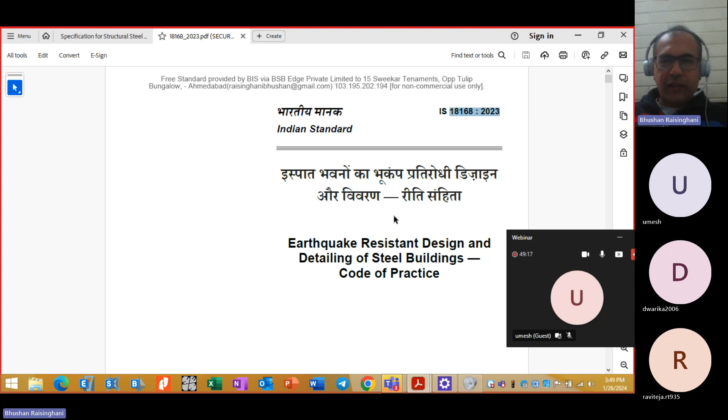I hope my screen is visible to all. Yes, it is visible, sir. So it is from year 2023, just last year it was released, and the title is Earthquake Resistant Design and Detailing.

So it is both design and detailing of steel buildings, code of practice. Buildings designed as per this standard are expected to sustain damage during strong earthquake ground shaking, and the provisions of this standard are intended for earthquake resistant design of only regular type buildings in which there are no dampers or dissipation devices. To control loss of life and property, base isolation or other advanced techniques may be adopted if required, for which Part 6, base isolated buildings, should be referred - that is 1893 Part 6 2022.

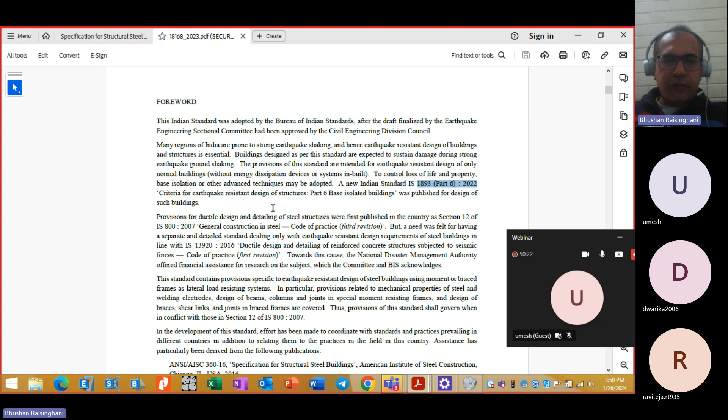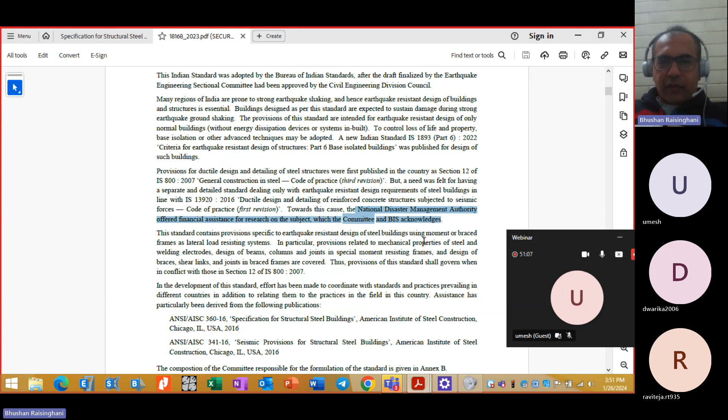Most importantly, the provisions for ductile design and detailing of steel structures were first published in the country as section 12 of IS 800-2007, but a need was felt for having a separate and detailed standard dealing only with earthquake resistant design requirements of steel buildings, in line with 13920 that is for concrete. Towards this cause, NDMA offered financial assistance for research on the subject, which the committee and BIS code has now acknowledged. So the entire reason for development of this code has been mentioned here.

The standard contains provisions specific to earthquake resistant design of steel buildings using moment resistant frame or braced frame as your lateral load resisting system. So moment and braced lateral load resisting systems are covered in this code. In particular, provisions related to mechanical properties of steel and welding electrodes, design of beams, columns, joints in SMRF, and design of brace, shear link, and joints in braced frames are covered. So all these aspects related to the special moment resisting frame and the braced frame are covered in this code, which were previously in section 12 of IS 800-2007.

So that was found to be limited, that's why a separate code has been detailed out for this particular purpose. Thus, provisions of this standard shall govern when in conflict with those of section 12 of IS 800-2007. So these are the latest standard and latest clauses which should govern the old clauses that were released in 2007 in IS 800. I hope the first part is clear - why and where to use this particular code.

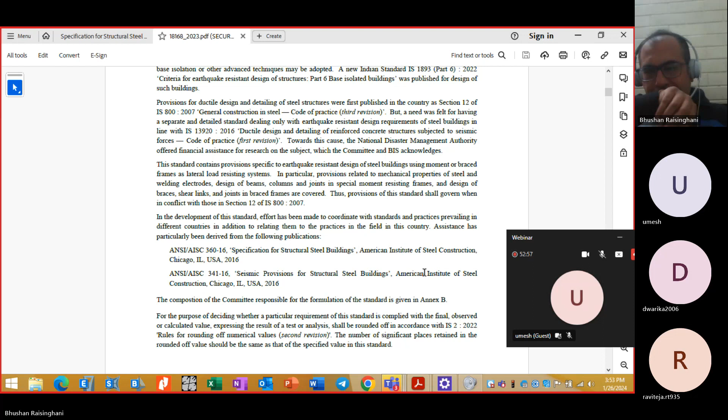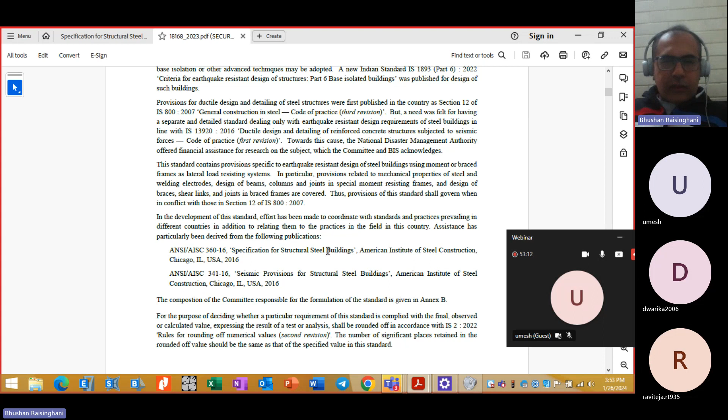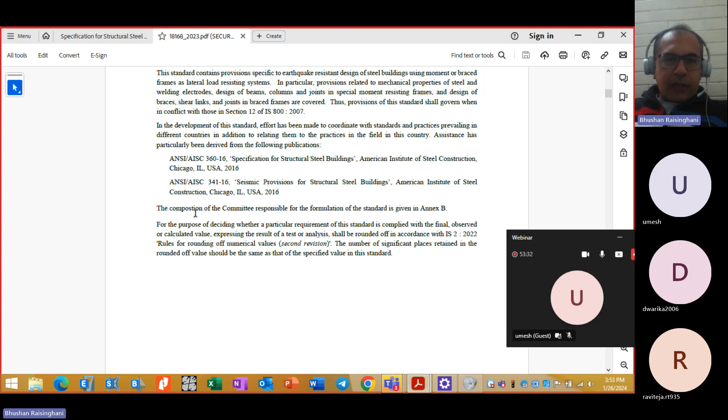Development of this standard has been coordinated with standards and practices across the globe. Assistance has been taken from AISC 360 and AISC 341 - specifications for structural steel buildings and seismic provisions for structural steel buildings respectively. AISC provisions have also been referred for development of this code. The composition of the committee is in Annexure B.

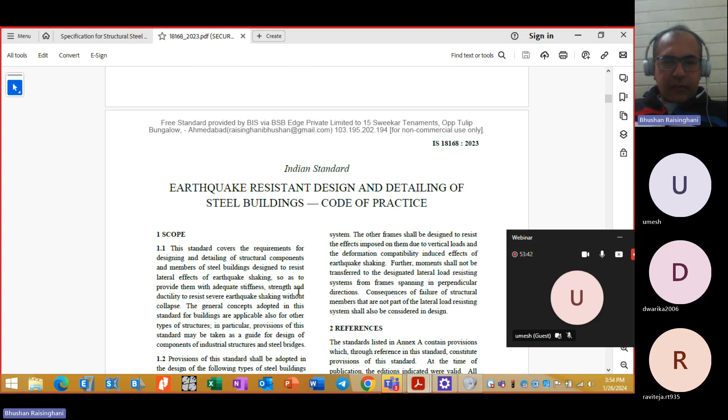Now we will start with this standard. Design and detailing, both aspects are covered for structural components and members of steel buildings designed to resist earthquake shaking, so as to provide them adequate stiffness, strength and ductility to resist severe earthquake shaking without collapse. This line is same as IS 13920, where the same statement has been given, so it is repeated here.

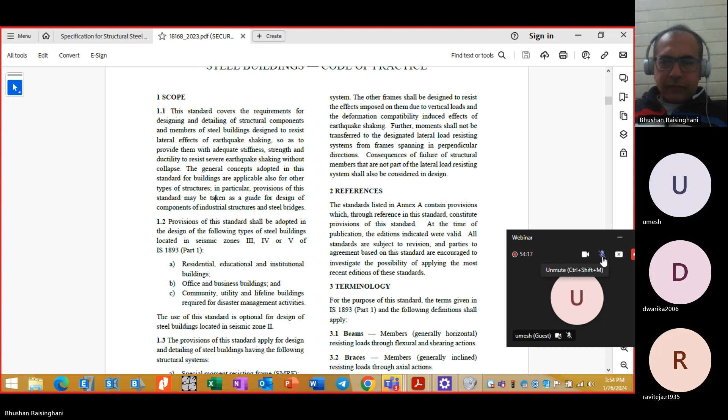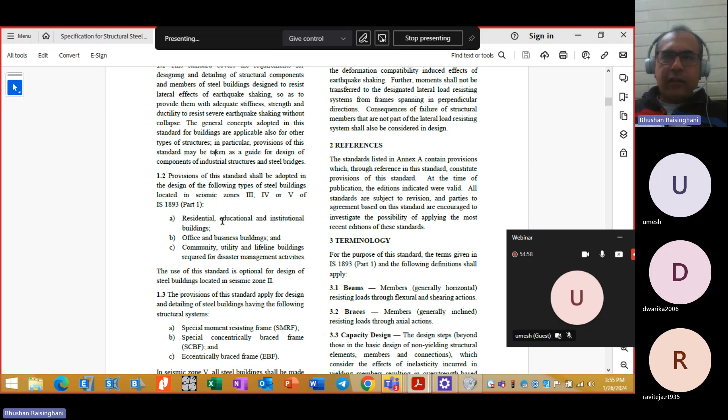The provisions of this standard shall be adopted in the design of steel buildings located in seismic zone 3, 4 or 5 of IS 1893. Now we have zone 6 as per IS 1893 2023, so if zone 6 is there, this standard will be updated later on. So in high seismic zones, except 1 and 2, this code has to apply. Again, this is the same statement as in 13920.

Residential, educational, institutional, office, business buildings, community, lifeline, utility - all buildings must comply with this standard. It is optional for buildings in seismic zone 2.

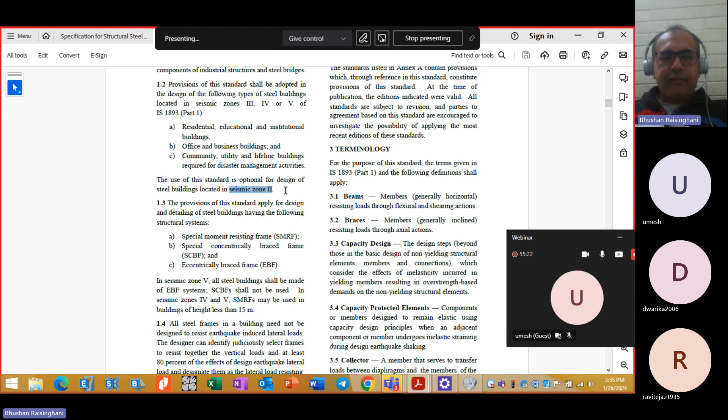The provisions of this standard apply for design and detailing of steel buildings having the following structural systems: SMRF, special concentrically braced frame SCBF, and eccentrically braced frame EBF. So we are using three types of frames - one is special moment resisting frame, concentric brace frame, and eccentric brace frame. These three frames are used for the LLRS, and detailing and design clauses have been given in this code for each.

In seismic zone 5, all steel buildings shall be made of EBF. For zone 5, only eccentric brace frame is proposed. The reason is it gives higher energy dissipation and the failure position is also better, and that is why eccentric braced frame has been suggested for seismic zone 5.

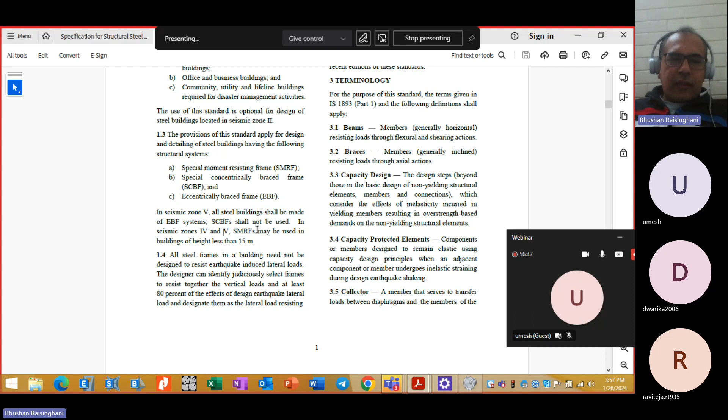To design EBF, you need to refer a separate document, or some research papers by our IIT professors. You can refer to that and understand better how EBFs have to be designed exactly. So for zone 5 it is the EBF system, and SCBF, that is concentric brace frame, should not be used.

We can still use SMRF but not SCBF. In seismic zone 4 and 5, SMRFs may be used in buildings of height less than 15 meters, not more than 15 meters. So in zone 4 and zone 5, for buildings more than 15 meters, you have to use eccentric braced frames only, as per the requirements of this code.

So for factory buildings, you can use moment resisting frame, SCBF, or EBF. SMRF and EBF is possible in seismic zone 4 and 5 up to 15-meter height. If the factory shed is, let's say, 22 meters, then it will go against this code. So for just a 7-meter increase in height, the structural requirement or framing system will change to eccentric braced frame as per this code.

However, for 22-meter or 30-meter height, we are not using EBF till now. We are mostly using moment resisting frames only, and we are also using SCBF, concentric braced frames. So when we give braced bays in our industrial sheds, those braced bays come under SCBF as they are concentrically braced, and moment resisting frame in the other portal frames. So wherever the braced bay is there, we are currently following SCBF and moment resisting frame. But as per the new code requirements, we cannot provide this.

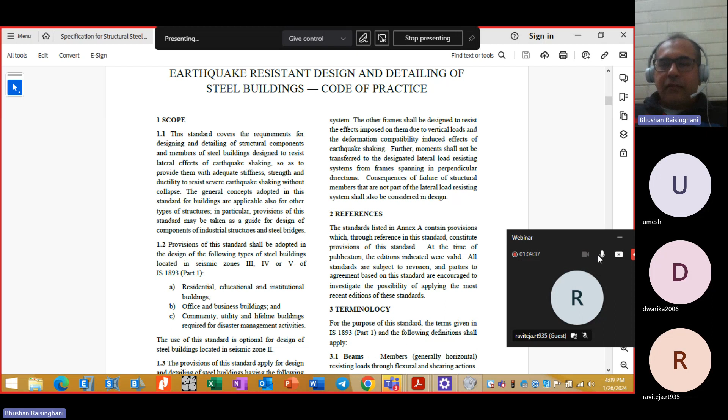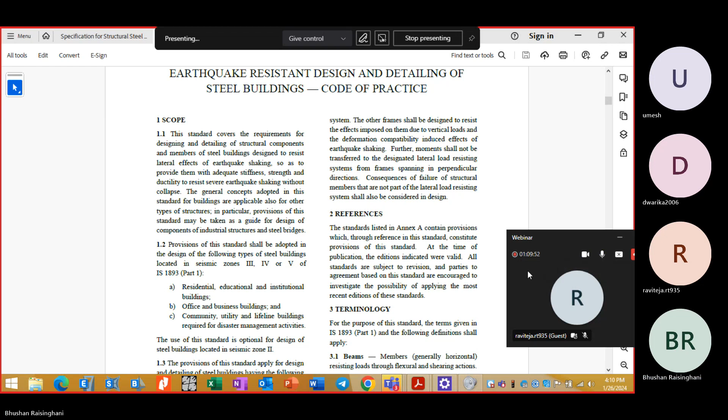So now the terminology, I will not cover all terminology. You can go through the definitions. The definitions are very clear.

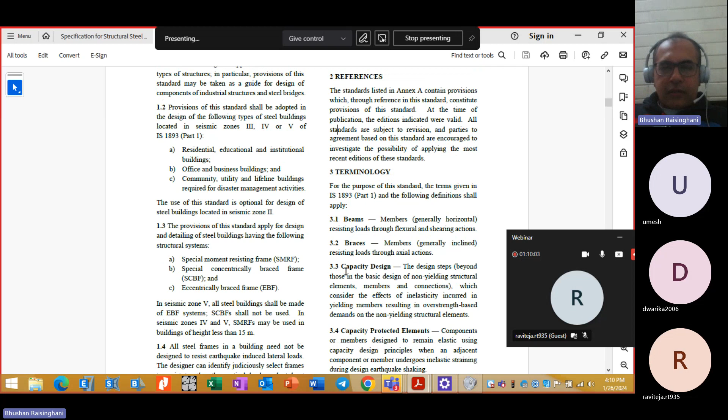Now capacity design - how we see in concrete buildings, like beam fail. So hinges get formed in the beam, not in the column. Then it gives a good failure mechanism, that is we call a beam mechanism. Similarly, in plastic analysis that we do for steel frames, if the beams are failing, then it is a beam mechanism. If the column is failing, then it is a column mechanism. If both are failing, then it is a combined mechanism. So how the frame is going to fail under lateral forces is actually very critical for energy dissipation and ductility. What would be the capacity of the frame to take the lateral forces? It will be governed in this particular manner, and if the beams are failing before the columns, it will be a capacity based design approach and will have higher energy dissipation capability.

So capacity design - the design steps beyond those in the basic design of non-yielding structural elements, members and connections, which consider the effects of inelasticity incurred in yielding members, resulting in overstrength based demands on the non-yielding structural elements. So basically, in some members, inelasticity will get developed. In other members, overstrength will get developed because they are not going into the inelastic zone, but they are going through that same displacement. So the design steps consider the effects of inelasticity incurred in yielding members - some are yielding now, resulting in overstrength based demands on the non-yielding structural elements. So how we are dealing between two elements - one is taking the earthquake forces that will yield, and other non-yielding members, how will they behave?

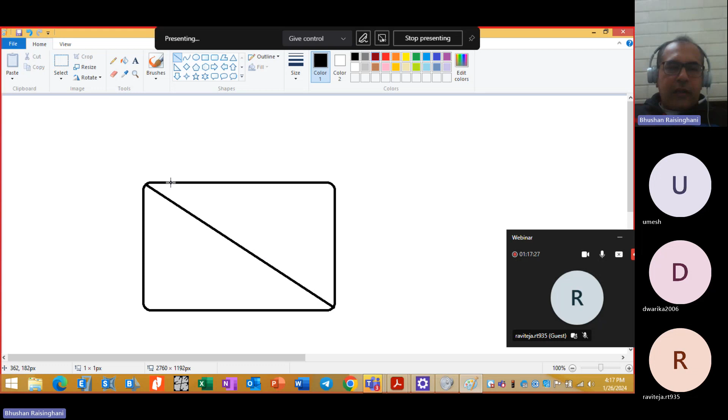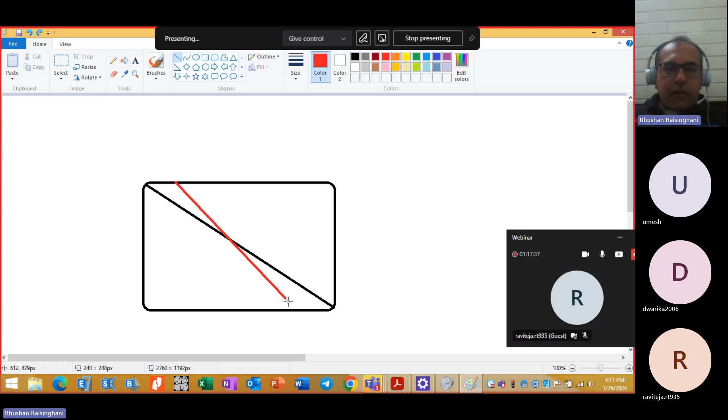So if this is a particular story with bracing, this is a concentrically braced frame, whether special or otherwise - the braces follow the center line. For eccentric bracing, at least one end should be on the beam, and the other can be concentric like this, or also eccentric like this - eccentricity in two directions, top and bottom, or eccentricity on one side only. So at least on one side, if the brace connection is eccentric, it resists force by axial action, and also resists shear forces. That's how eccentrically braced frames and concentrically braced frames are defined. Based on that, the lateral load resisting system will have a higher R factor - your R factor is governed by the system you choose. In zone 5, you must use eccentrically braced frames for any building more than 15 meters in height, and you cannot use SCBF in zone 5.

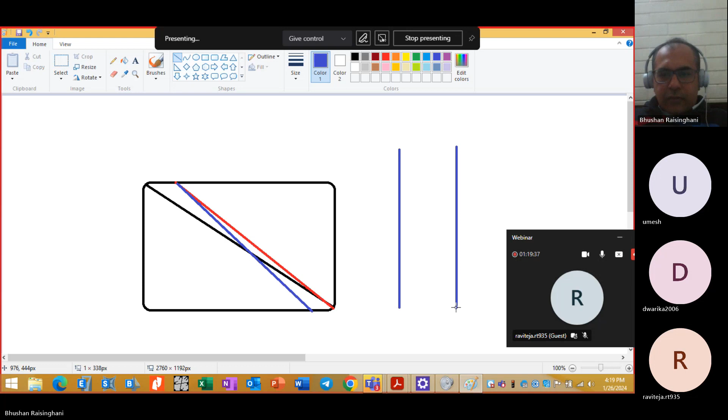Doubler plate is a new term that has been added - a plate provided parallel to the web of the column and connected along its own perimeter to the web of the column, and at some intermediate locations within itself when necessary. So if this is my column, these are the column flanges, and there is a plate inside the web, connected along the perimeter to the web of the column - these are called doubler plates. Where doubler plates are required depends on the detailing requirement, and based on that you can decide where doubler plates would be required in your building.

Shearing and flexural action are taken by the links. So this eccentric brace frame takes the axial force as well as the shearing and flexural forces. It is specially designed and detailed to provide ductile behavior.

Joint panel zone is very critical in design for steel buildings where the beam and column are framing into each other. At that position, the panel zone gets created, and a high amount of shear, flexure, and torsion moments get concentrated. Due to diagonal tension, this zone may fail. So it has to be properly detailed for earthquake forces as well as other forces coming onto the building.

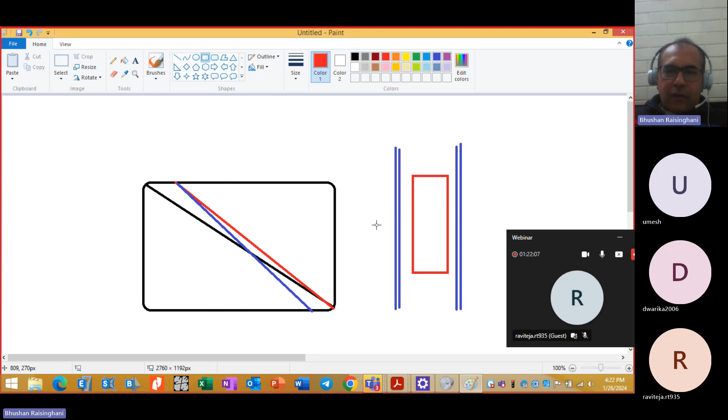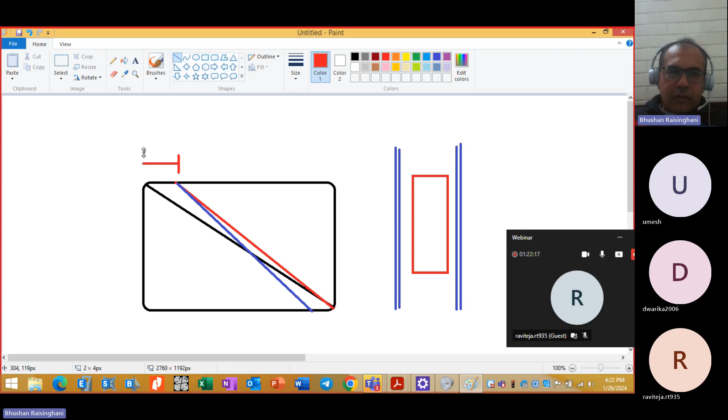So what is a link? It is the segment of a beam that is located between the ends of the connection of two inclined braces in an eccentric brace frame. So here you can say this much zone is a link. This is the link zone. So this link takes the shear and flexure, and this takes the axial force.

Protected zone, a new term, is the area of a member or connection element designed to undergo inelastic straining under design earthquake effects, and is required to be devoid of additional attachments or discontinuities resulting from fabrication and erection procedures. So what is a protected zone? It's the area designed to undergo inelastic straining during the earthquake. So all those are called protected zones. No discontinuity is allowed there. It should be fabricated continuous, with no discontinuity in those protected zones, so that the flow of forces happens correctly.

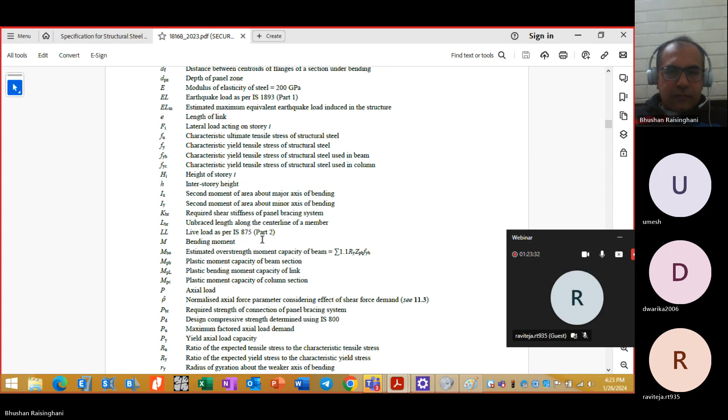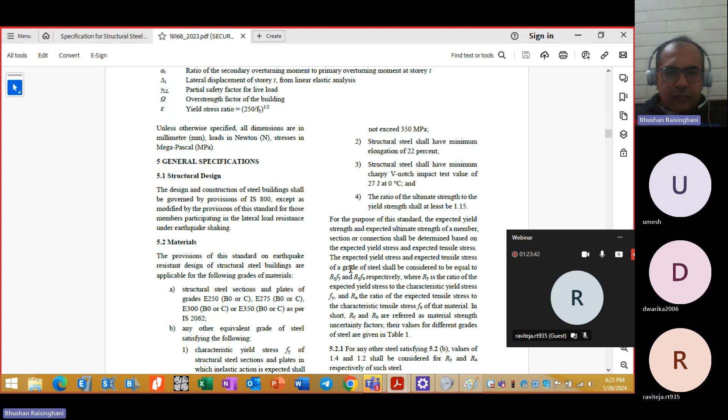I hope up to this point it is clear, because we have dealt with the principle and philosophy of how we are going to design special concentric brace frames, eccentric brace frames, and moment resisting frames. Many things will remain as it is, but understanding how to implement all these things is very critical, which has been covered in this code in a very short manner. You need to refer to good publications or the AISC code to understand it in more detail.

So design and construction of steel buildings shall be governed by the provisions of IS 800, like we do for IS 456. IS 800 is a standard code, except as modified by provisions of this standard for those members participating in the LLRS. So for members that are part of the earthquake resistant lateral load resisting system, the clauses of this standard will govern. Otherwise, IS 800 will govern.

So what is the type of material to be used? That also has been mentioned here. Grades E250, 275, 300, 350. Now in that, grade B0 or C has been mentioned as per IS 2062. So you need to check that the material you are using is of this particular type only, or any other equivalent grade of steel satisfying the following. So now steel sections are this.

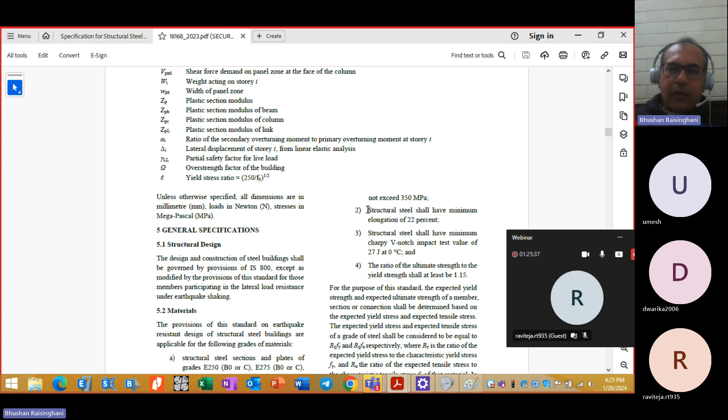Now what is the additional requirement? Characteristic yield stress Fy of the structural steel sections and plates in which inelastic action is expected shall not exceed 350 MPa. So your yield stress, where inelastic yielding is going to happen, should not exceed 350 MPa. So Fy is limited to 350 MPa.

Structural steel shall have a minimum elongation of 22%, like it is 14.5% for concrete buildings. This is 14.5% for concrete, and 22% for steel buildings. So elongation of 22% has to be maintained.

Structural steel shall have a minimum Charpy V-notch impact test value of 27 joules at 0 degree Celsius. This test has to be confirmed for other materials than the structural steel plates. The ratio of ultimate strength to yield strength shall be at least 1.15. So when we are going towards higher grade steel, this is a critical requirement.

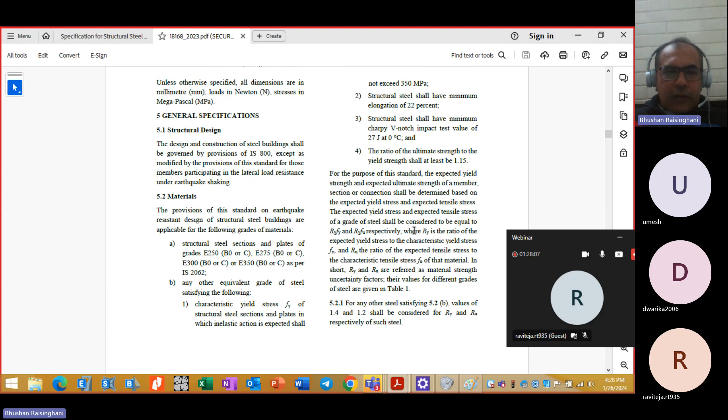Any other steel satisfying 5.2b - values of 1.4 and 1.2 shall be considered for Ry and Ru respectively for such steel. So other than structural steel, 1.4, 1.2 is given. For structural steel, you need to find Ry and Ru from the table.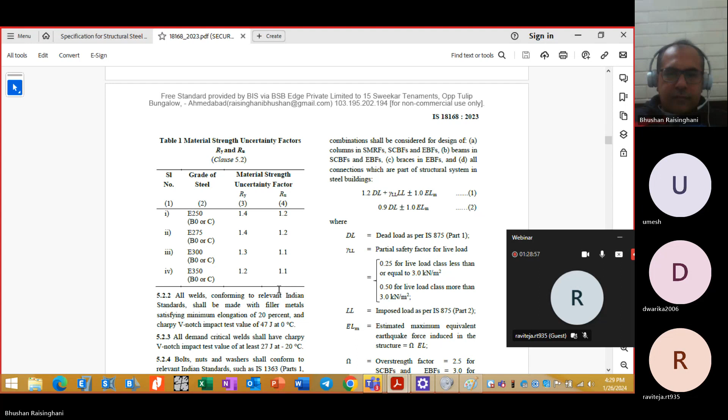The filler material for weld shall conform to elongation of 20% and Charpy V notch impact value of 47 joules at 0 degree Celsius. So 20% for filler material, elongation should be there. All demand critical welds shall have Charpy V notch impact value of at least 27 joules at minus 20 degree Celsius. So 47 at 0, 27 joules at minus 20 degree Celsius.

So this is for Charpy V notch impact value for demand critical welds. Bolts, nuts and washers shall conform to relevant Indian standard that have been given here. Very important is section classification. Structural sections of lateral load resisting system shall comply with the width to thickness requirements specified in table 2. So we'll go to that after this.

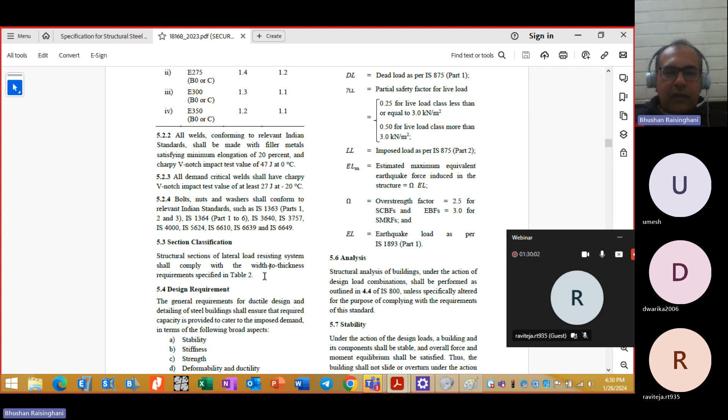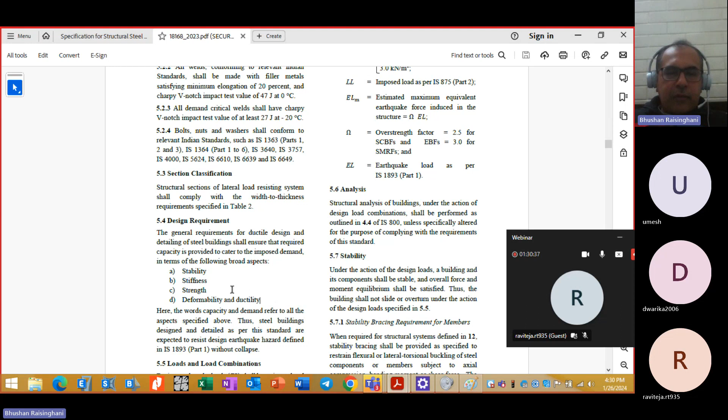Now, the general requirements for ductile design and detailing of steel building shall ensure that required capacity is provided to cater to the imposed demand - capacity for the demand in terms of stability, stiffness, strength, deformability and ductility. So all four criteria, robustness, all those aspects given in 13920 are mentioned here in this particular code. Stability, stiffness, strength, deformability and ductility are important criteria. Here, the words capacity and demand refer to all the aspects specified above.

The steel building designed in detail as per the standard are expected to resist the design earthquake hazard defined in IS 1893 Part 1 without collapse. So no collapse should happen for buildings designed with this particular code. The real purpose of providing ductile detailing in steel buildings or concrete buildings is to restrict the collapse of the building and give time for the occupants to evacuate the building and be safe, after which the building can fall and you can reoccupy after undergoing a thorough inspection.

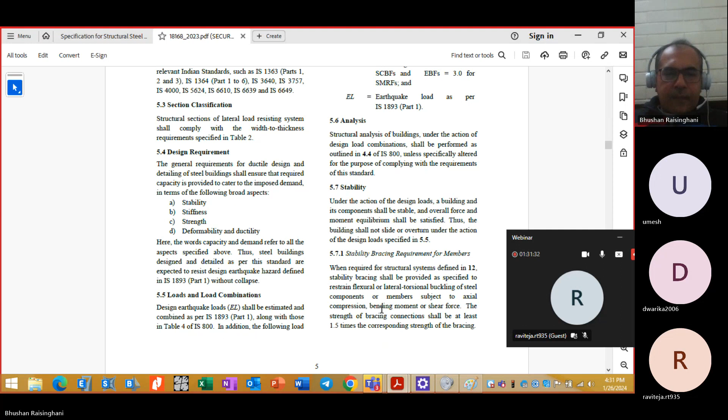Now loads and load combination. Design earthquake load shall be estimated and combined as per IS 1893 Part 1 along with those in Table 4 of IS 800. In addition to those load combinations, the following load combination shall be considered for design of: columns in SMRF, columns in SCBF and columns in EBF, then beams in SCBF and EBF.

So columns in all frames, beams in brace frames only, braces in eccentrically braced frame, and all connections which are part of structural system in steel buildings should have this particular load combination: 1.2 dead load plus gamma LL live load plus or minus earthquake load M, then 0.9 dead load plus or minus earthquake load M. Now earthquake load M is the estimated maximum equivalent earthquake force induced in the structure.

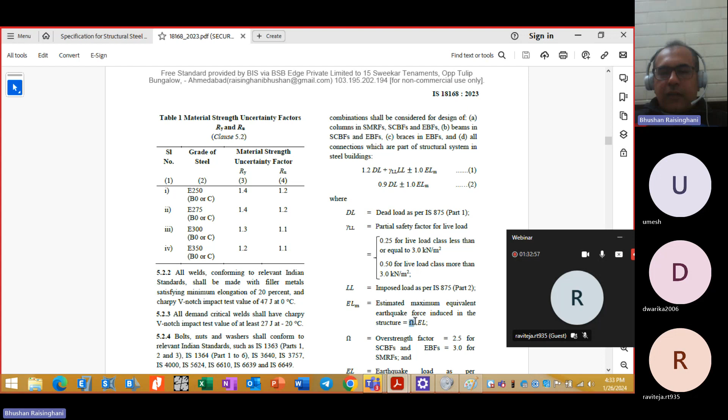That is overstrength factor into earthquake load. This overstrength factor is given here: 2.5 for SCBF and EBF, 3 for SMRF. So the capacity is 3 times that we are providing for the failure - the steel can take 3 times more force. That's why it is an overstrength factor of 3 for SMRF and 2.5 for SCBF. Similarly here your factor is 1, but here it is 3 times and 2.5 times. So apart from the load combination, these special 2 load combinations have to be added for steel buildings for the given design cases.

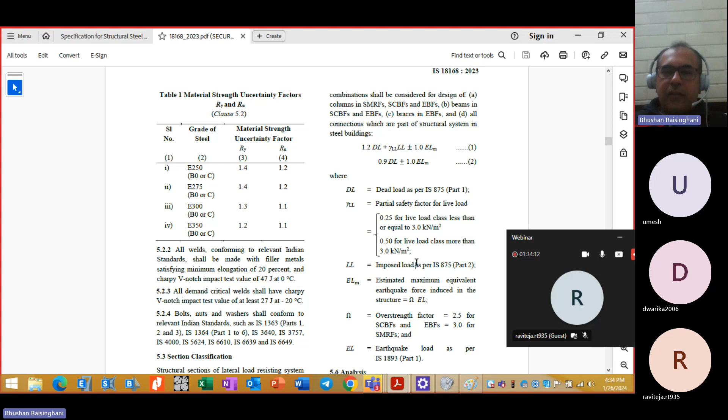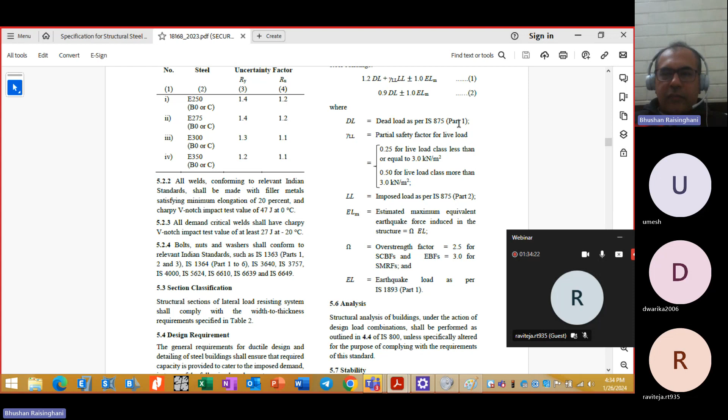Now gamma LL is the partial safety factor for live load. It is 0.25 for up to 3 kN per meter square, 0.5 for more than 3 kN per meter square - that is the part live load we consider for seismic weight calculation. Same criteria applied here. Now imposed load as per part 2, and this is dead load as per part 1. So special load combination to be considered.

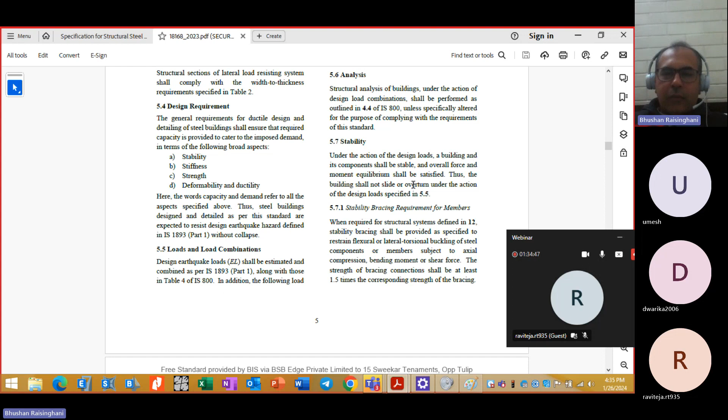Thus, the building shall not slide or overturn under the action of the design load specified in 5.5. So 5.5 is your load and load combination. The building shall not slide or overturn under the action of the design load, special design load case that is specified in 5.5. It should not overturn or slide.

Now, stability bracing requirement for members when required for structural system defined in 12. Stability bracing shall be provided as specified to restrain flexure or lateral torsional buckling of steel components or members subject to axial compression, bending moment or shear.

So, to restrain the flexural or the lateral torsional buckling of steel components or members that are subjected to axial force, bending moment and shear force. So lateral torsional buckling and flexural failure should not happen, for which we are providing the stability bracing. You need to check where, like flange braces we provide in PEB buildings, that is to avoid the lateral torsional buckling of the rafters and top flange of the rafters. So that way you need to check where the stability bracing needs to be provided, so that lateral torsional buckling as well as flexural failure does not take place.

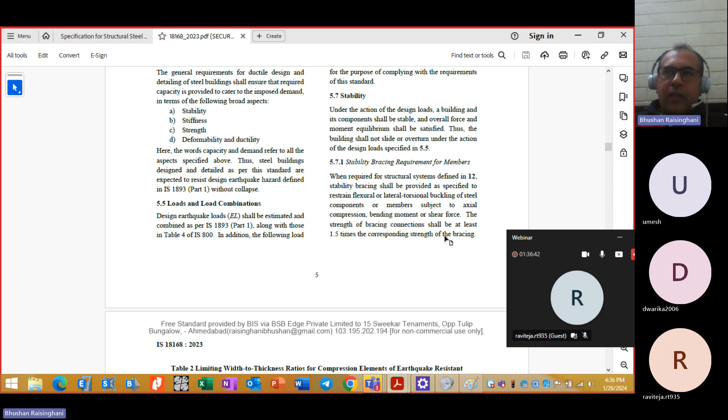The strength of the bracing connection shall be at least 1.5 times the corresponding strength of the bracing. So capacity factor given as 1.5 - what we have as 1.4 in 13920, it has been given as 1.5 for the bracing connection. The capacity of bracing multiplied by 1.5 times.

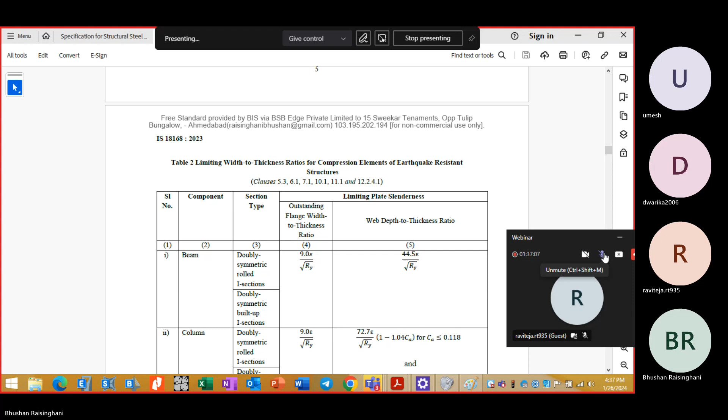So this is interesting, same table we have seen. Just a second. So the same table we have seen in IS 800:2007, in which we have the A, B and C category for different types of members. The same has been made for limiting - section classification is very critical. Now that has been included in 2007 code 800 as well as in this code, both need to be followed. For lateral load resisting members, you need to follow this table.

Now, limiting width to thickness ratio for compression elements. Compression element may be bracing or it may be column of earthquake load resisting structure. So limiting width to thickness ratio for compression elements.

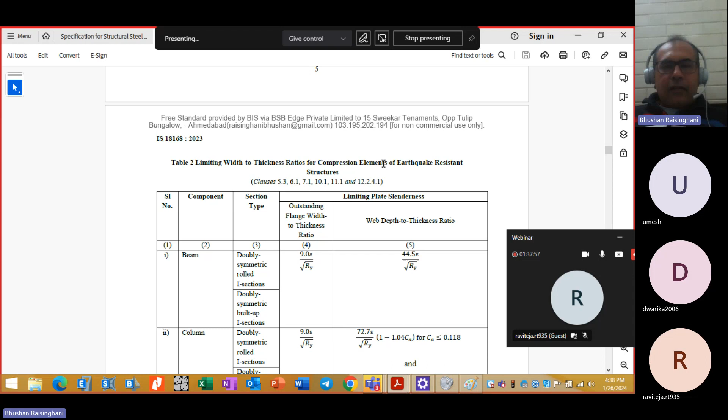Okay, so if it is a beam, then section type doubly symmetric rolled I section. So outstanding flange width to thickness - flange width to thickness ratio 9 epsilon upon root of Ry. Web depth to thickness ratio 44.5 epsilon upon root of Ry. So depth of the web and thickness of the web and thickness of the flange should be governed by these two criteria for doubly symmetric rolled I section beam.

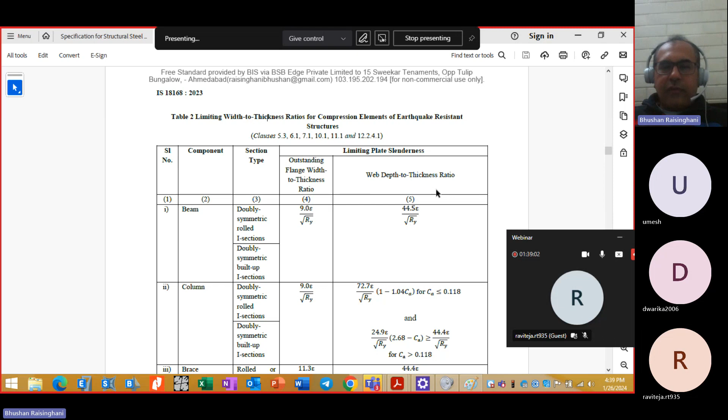Doubly symmetric built up I sections - so top and bottom are same flange, that is doubly symmetric. On both sides it is the same properties. So whether it is a built up section or a rolled I section, you need to follow this particular requirement. Now for column, doubly symmetric rolled, doubly symmetric built up I.

Again, your flange thickness is governed by this. Your web thickness is governed by this particular formula in which Ca is less than or equal to 0.118, and Ca greater than 0.118 - you need to follow this formula for thickness of the flange and thickness of the web.

And for bracing, rolled or built up I section, box section - there is no outstanding flange to thickness ratio, but in all cases whatever the thicknesses are, your formula will be the same for box section. So 21.4 epsilon upon root of Ry will remain the same.

Flange width is the flange width minus thickness of the webs. So on the top side, if you consider the flange, then apart from the thicknesses, whatever width is available in between, that you take as the width. And the vertical will act as a web - vertical web, horizontal your flange, minus the thickness of the web, whatever is left in the width of the box section, that will be taken as the width. So width thickness here, flange thickness here.

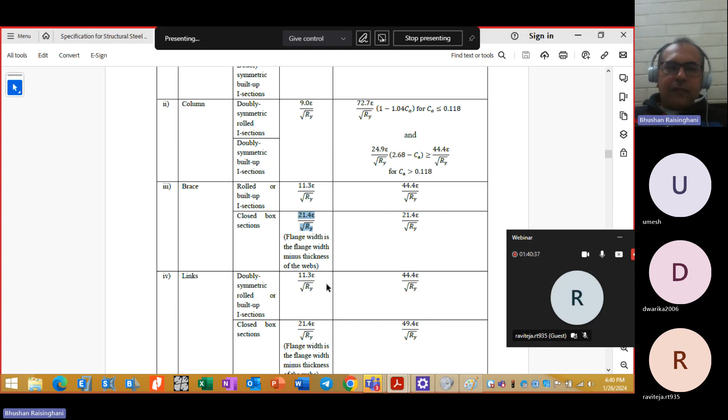Now it is links - so a link, as I told, is the beam between the two end portions of the bracing. Now, doubly symmetric rolled or built up section, closed box section - so for your flange and for your web, the formula is given. For box section, for the flanges, it is 21.4 epsilon upon root Ry, which is same as above. But for this particular box section, it is 49.4 epsilon upon root of ry. So in the link section, your web thickness has to be higher and your flange thickness can be smaller for link elements. But for brace elements, it can be the same for box section.

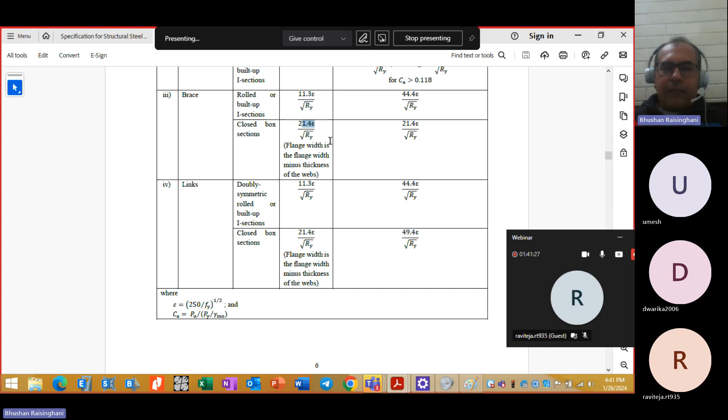Now Ca is equals to Pu upon Py upon gamma m0. So this is the material factor that we already use. Py, yield force, and ultimate axial force - that is what you get. Ca, epsilon is 250 upon Fy, the whole root.

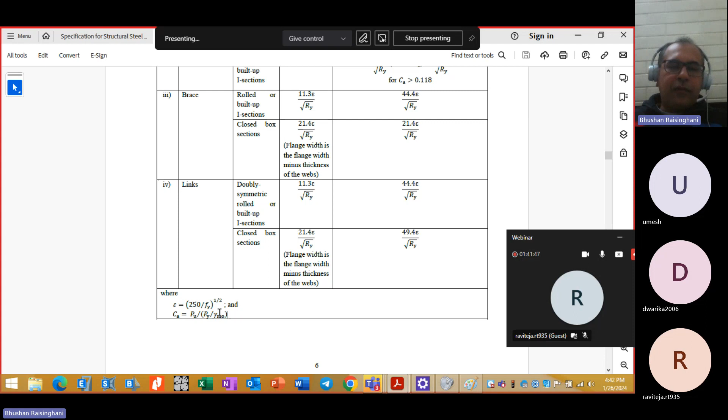So I hope you have referred to this table previously, and you need to follow it rigorously right now.

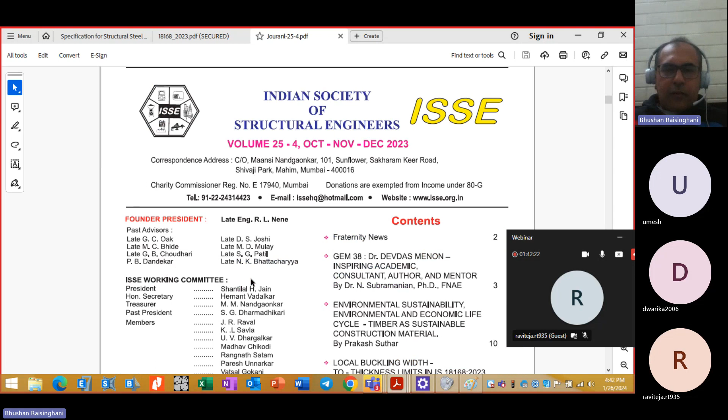There is one article written by Dr. N. Subramanian on this particular aspect of local buckling width to thickness limits in IS 18168:2023, on page number 13. It's downloadable from the website of ISSE, the Indian Society of Structural Engineers. You can download it from there.

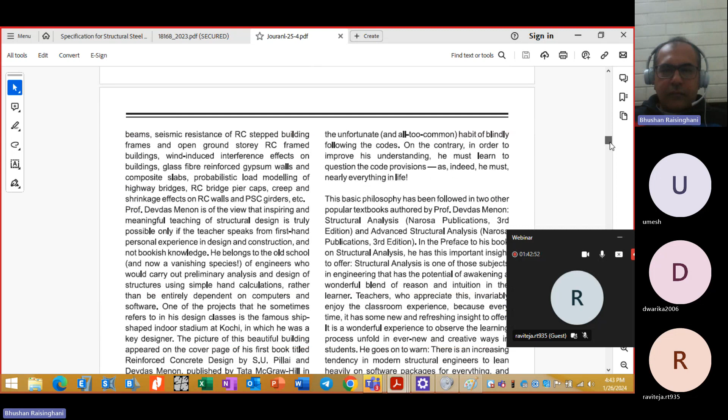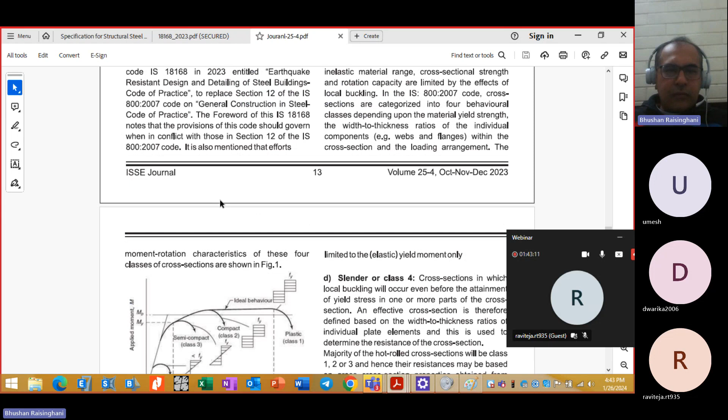So here you can see structural steel design. Let us go to the conclusion for right now. All types of sections have been mentioned here.

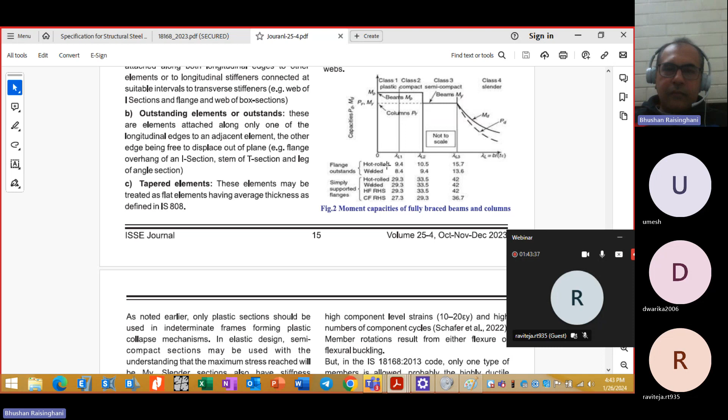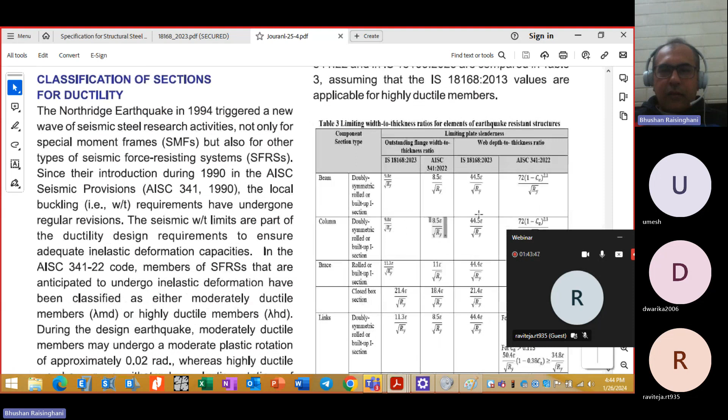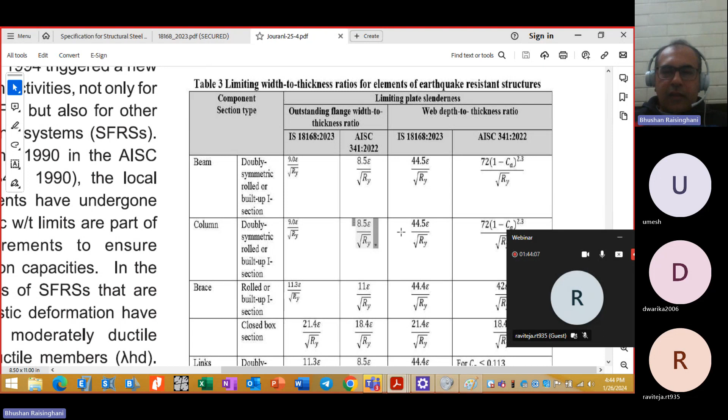So classification of section as per ductility, compared with AISC code. Here it is 9, here it is 8.5 in AISC, here it is 44.5, it is 72, 1 minus Ca to the power 2.3 upon root of RY. Comparing 341 and 18168, both factors are compared, and more or less you might not get a lot of difference. Minor differences you will get in this particular case. But major differences are in this formula for box sections in the links—it is very high, double than required as per AISC.

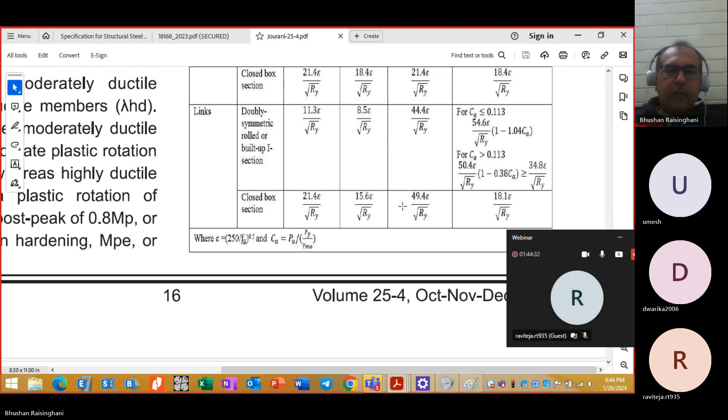Cross section width to thickness limits are a long-standing and reliable means to ensure behavioral objectives related to local buckling performance of structural steel members. Establishing the underlying assumptions inherent in the current width to thickness limits, developed over the course of the last 80 plus years, is critical to structural steel design using new steels and configurations. Existing width to thickness ratios given in the two codes suggest that each limit is unique to each element and loading, while actual limits are based on a small number of targeted non-dimensional plate slenderness checks.

So for the full section, what would be the response? We are not exactly understanding that. Seismic width to thickness limits provided by the two codes are not only to achieve the required strength, but also to ensure ductility and avoid premature fracture in a variety of different seismic force resisting systems.

These width to thickness ratios include Ry, which is the ratio of the expected yield stress to the characteristic yield stress, and depends upon the grade of steel. The limiting width to thickness ratios given in AISC and IS are compared, and it is found that values given in AISC are slightly different, especially for the web sections. A summary of the application of these width to thickness limits and their intended objectives is provided.

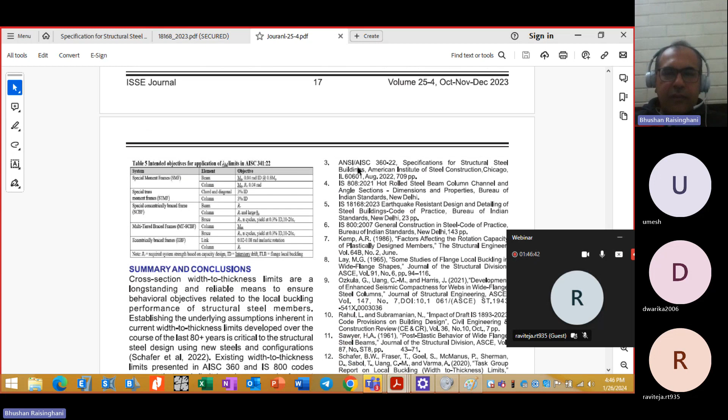Although AISC code allows either moderately ductile members or highly ductile members, IS seems to allow only highly ductile members, so there is no intermediate ductility available. We are only aiming towards highly ductile members, and the purpose of Ry is to derive these values based on the grade of steel. This is one paper shared—you can also refer to it, cross-referencing with other codes, and try to gain more insight into what has been suggested in the code and what the international norms are.

So, deflection limit as per IS 800—based on that, stiffness needs to be provided. Drift, the story drift for SMRF, shall be estimated considering stiffness of the finite size beam column joints. In absence of rigorous analysis, centerline dimension of member shall be used to estimate the story drift. For braced frames, centerline dimension of member shall be used. That criteria is not mentioned, but you need to check the drift.

Now the P-delta effect has been mentioned—whether it is a sway frame or not: Wi delta I upon Hi into Fi. Wi is the gravity load, Fi is the horizontal force, Hi is the height, and delta I is your horizontal displacement. The same formula has been mentioned, but I think some things are missing here. It is the same as the formula given in IS 456 for sway frame and non-sway frame. So whether to consider P-delta effect or not is based on sway frame or non-sway frame, but all frames that take lateral force are sway frames, so you will have to consider the P-delta effect in that.

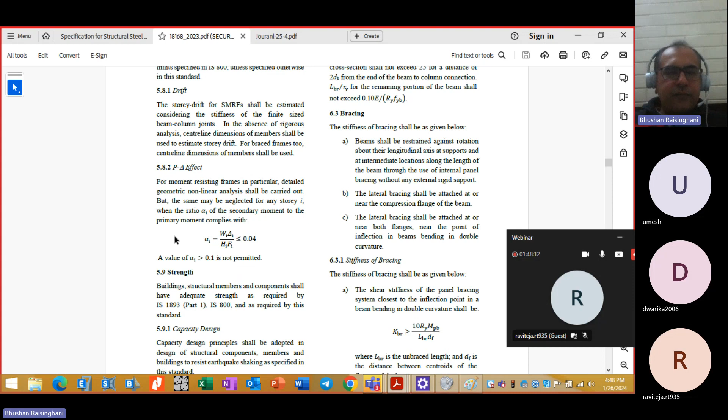A value of alpha i greater than 0.1 is not permitted—that is a very highly slender frame if alpha is greater than 0.1, so that is not permitted. Strength as per IS 800—capacity design we need to follow.

The ratio of maximum unbraced length of the compression flange of a beam to the radius of gyration about the weaker axis of the beam cross section shall not exceed 25 for a distance of 2 times dB from the end of the beam to column connection. So LB upon Ry for the remaining portion of the beam shall not exceed this limit. So slenderness of the compression flange needs to be addressed, and for a length of 2 times dB, it should not exceed 25. For beyond that length, you can keep the unbraced length upon Ry to this particular limit.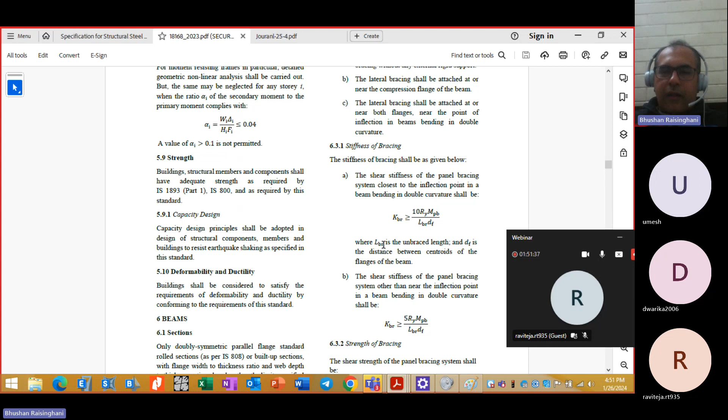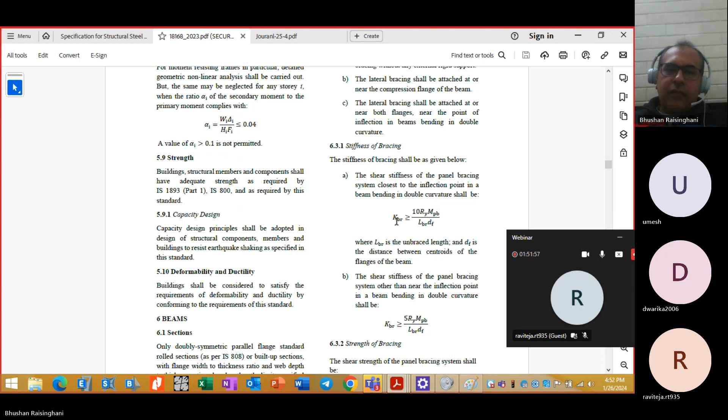Now, the stiffness of the bracing shall be as below. The shear stiffness of the panel bracing system closest to the inflection point in a beam bending in double curvature shall be 10 Ry Mpb upon Lbr into df. Lbr is the unbraced length, df is the distance between centroids of the flanges of the beam. This Mpb we refer to above, that is basically a moment, and based on that moment we find the stiffness. It should be greater than whatever you are providing.

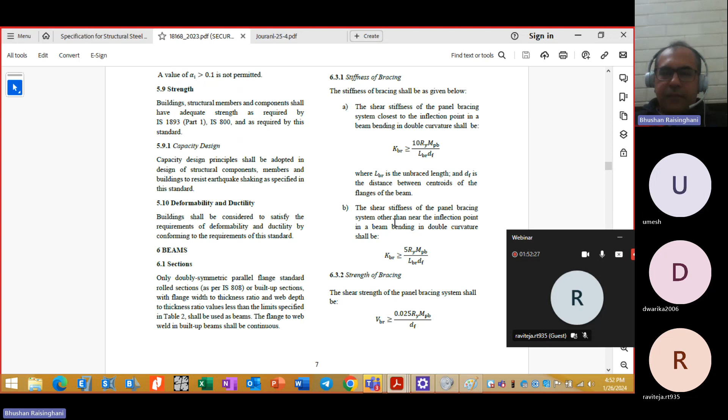The shear stiffness of the panel bracing system other than near the inflection point in a beam bending under double curvature: for the inflection point it is 10, for other locations it is 5. So the requirement becomes double for bracing near the inflection point compared to other than the inflection point. Now the strength of the bracing shall be based on Mpb again, df, Ry, 0.025.

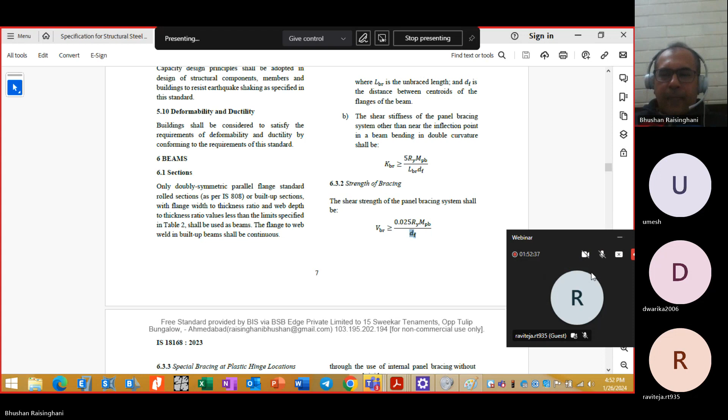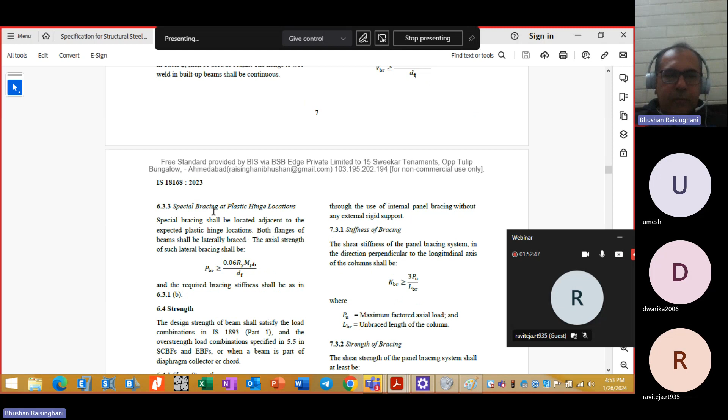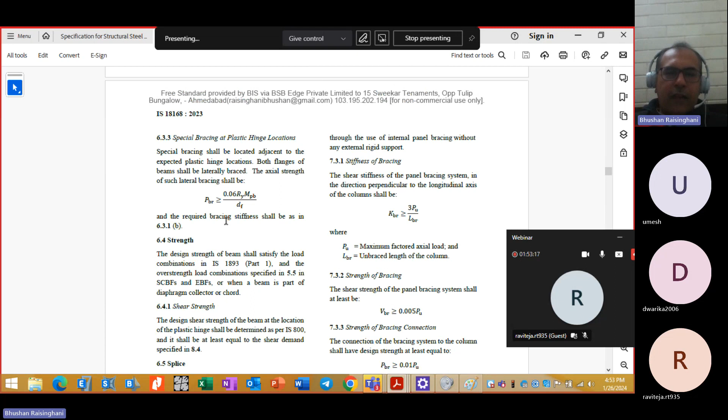Special bracing at plastic hinge locations shall be located adjacent to the expected plastic hinge locations. Both flanges of the beam shall be laterally braced. The axial strength of such lateral bracing shall be given by this formula. So this was shear strength of the panel bracing, and this is related to axial force. So both capacities have to be given to your bracing at plastic hinge locations and at the shear locations.

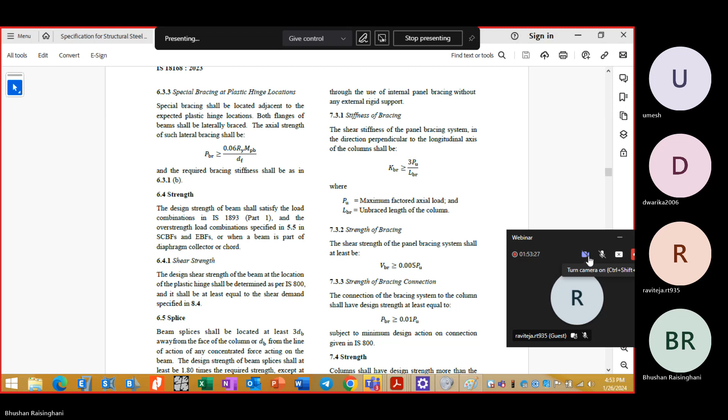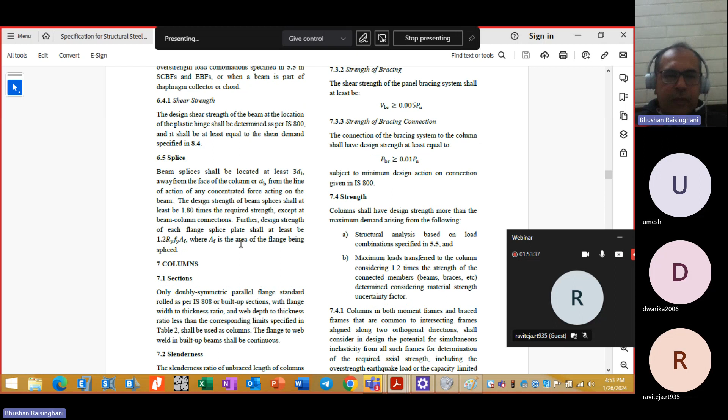So now for the strength, you can refer to this. If you have any query, you can let me know. Further, the design of each flange splice plate shall be at least 1.2 Ry Fy into AF, where AF is the area of the flange being spliced.

So right now we were covering beams. Now this moves into columns. As you know, we have already crossed 1.5 hours in the lecture, so should I continue or should we take it in the next session?

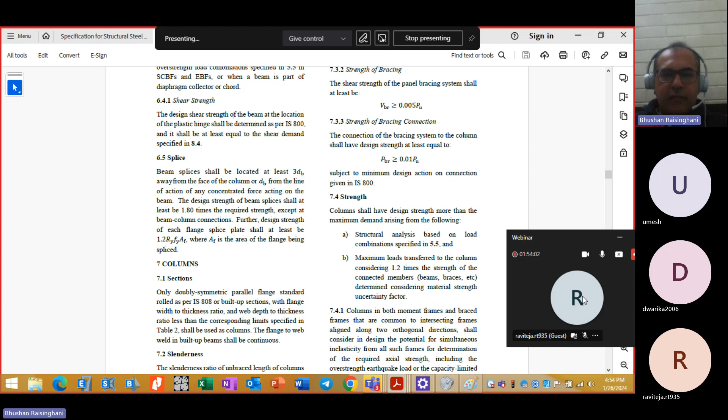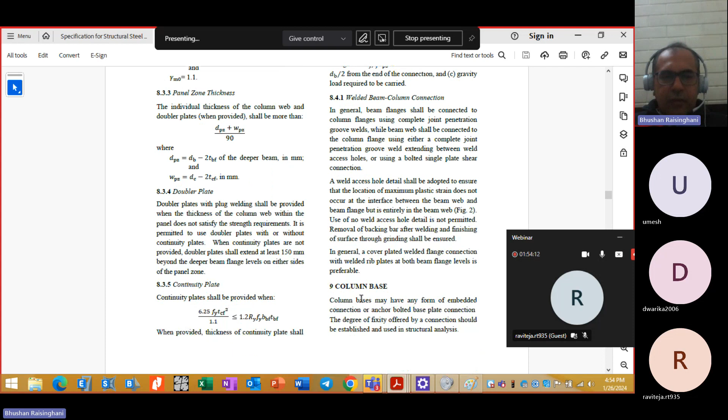In which you can also refer further and we can have a discussion on that. Next session, yeah. So I also feel it would be too much to address at a time. So you can go through the rest of the code and compare what we were doing till now and what difference is expected from us as structural engineers while designing steel buildings. That is very critical, and that is what I wanted to address today as well.